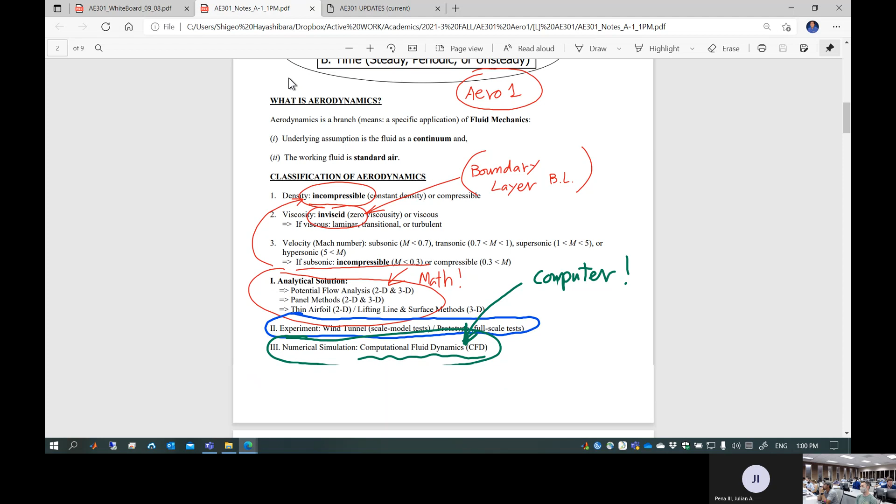Don't do that. Can you give us what is standard for each? Sure, let's just go back to the notes we covered in last class. Okay, that's the best way to start. I'm gonna talk to him, don't worry about it, let me handle that. PSI is not standard, so here we go. This is standard unit.

Stick with engineering. Okay, Aero 1. Sorry, so PSI, I never use that. Use PSF instead, it's pressure. Okay, here we go, this is standard. PSF, not PSI. You have to convert PSI to PSF. It's not kidding. Okay, you might be smiling here, but I'm dead serious.

People misunderstand that kind of basic things. That's why people die. All right, it's not joking. If I need to correct a professor, I'm corrected. I'm an engineer, okay? So don't believe PSI is the standard. Whoever said it, it's wrong. I can take it to the court and squeeze the money out of it. You said the wrong thing, right.

So this is PSF. Of course, foot is always used. Now the danger of using PSI is, of course, you keep using inches inside your computation and end up having the wrong result, and you never know because your argument is, well, I used inches throughout my computation. What's wrong with that? A students always do that.

Because they're so consistent, they don't believe they made a mistake. But pound force can never be created from inch, you need to have foot. Suppose you have a problem involving combining certain things to create pound force. Do you remember last class's example problem? If you use inches, you can never create pound force out of it, right? You need to have foot. Because pound force by definition is slug, not pound mass, slug foot per second squared. So don't stick your pound mass number in it. Don't stick your inch number in it.

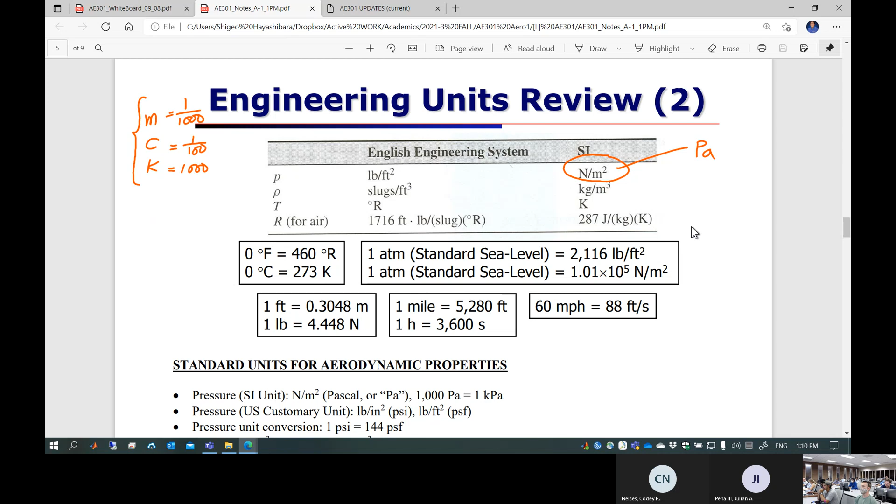So A1, we talked about engineering units. These are the standard units we are going to deal with in aerodynamics class. Obviously I'm not going to use PSI. If somebody gives me PSI, I'm going to quickly convert, first of all, to PSF, then move on from there.

You should do the same thing as you work on quiz 1, A and B. Pre-process to begin with, then use only the standard units and associated values in your computation in your calculator, and after you get the results, they should all be based on standard units. If you want specific units later, you can convert back again to get the desired units. It's a twice conversion process; pre- and post-processing is always involved in your computation.

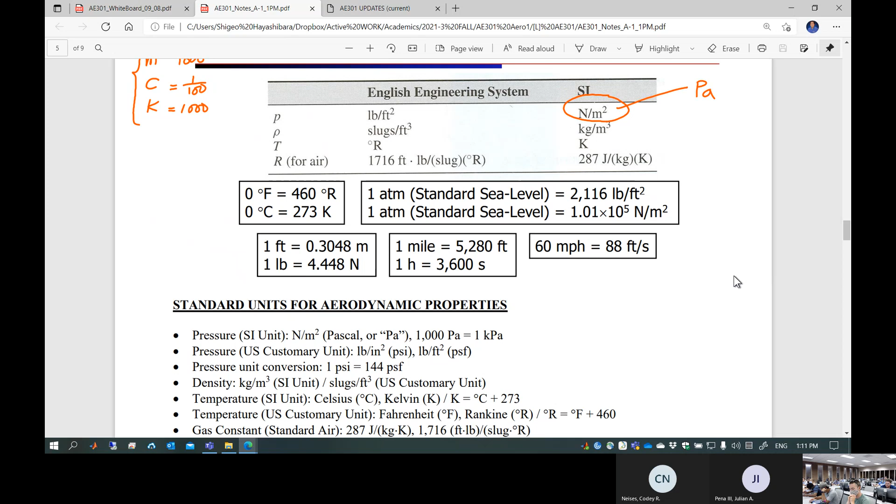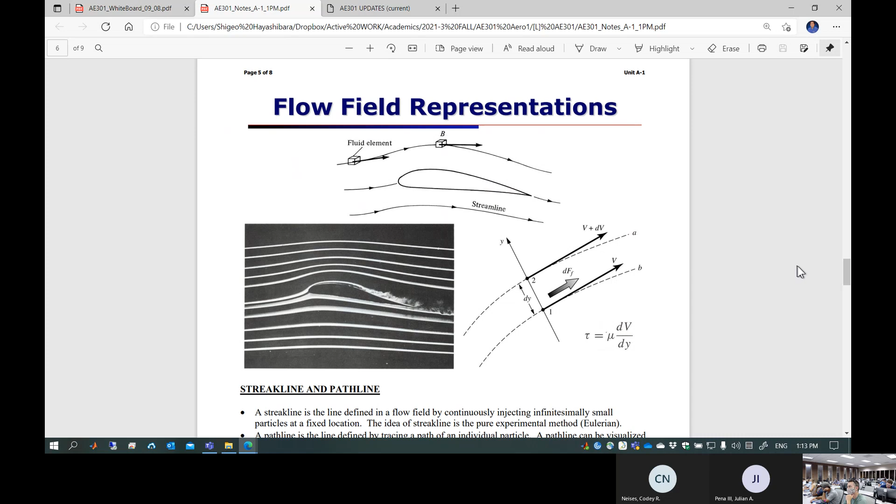Do you remember the flow visualization concept in fluid mechanics? We have 3 different kinds of concepts. Number 1, people talk about path line. What is path line? Is it different from streamline?

Isn't it path line? What is path line? Path line is where your fluid element travels. But a streamline, is it the same thing? It's the same thing, but not exactly the same thing. It's only the same when the streamline follows the path line. When does that happen? During steady state.

So in fluid mechanics, hopefully you've been exposed to three different concepts of flow field visualization. One is a path line. Is this a path line? Yes.

It's not. Anyways, the other one is a streak line. Is this a streak line? Yes, indeed, this is a streak line, it's not a path line.

Why is that? What's the difference between those two? Well, of course, it's a fluid mechanics concept. Path line is: if you release a single particle, that single particle takes the path. That's path line. This is a line made up by multiple particles released at a single spot - that's called streak line. It's basically ink, a streak of ink. If I have a pen creating a streak, this is a streak line.

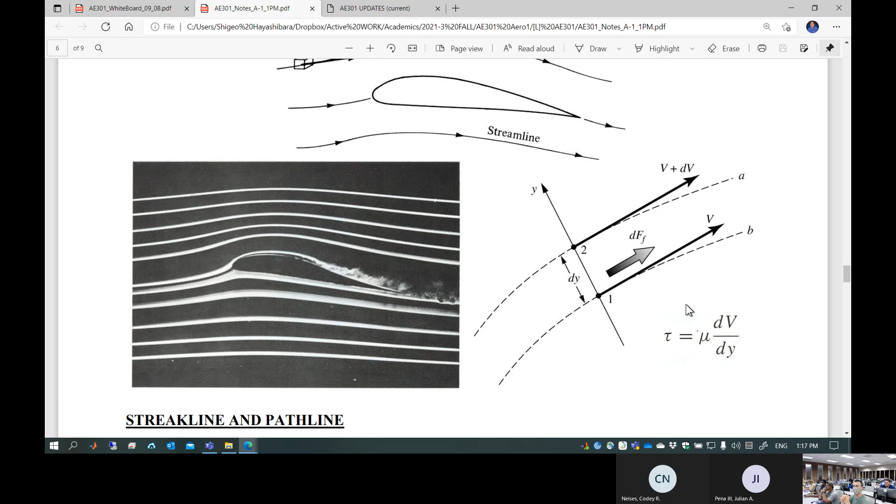So in aero, we are going to focus on streamline because it's a mathematical concept. Do you guys know the equation of streamline? Anybody? Go ahead, try. Have you ever seen the equation of streamline?

Okay, I'm going to let you derive it for the upcoming homework. So wait and see. If you don't know the equation of streamline, go rush back to your fluid mechanics, or take a look at my fluid mechanics notes.

Is it from Bernoulli's? No, equation of streamline - I'm not going to cover the same material over and over. This is an aero class. If you don't know what I'm talking about, go back and find out. Equation of streamline - is there such a thing? Yes, we do.

We're going to start from there because otherwise, how can we analyze the flow field? Aerodynamics uses mathematics to analyze the flow field. The simple starting point is picking up the equation of streamline. Do you guys know that? If you guys don't know even the equation of streamline, where do I start? I don't know - go back and find it.

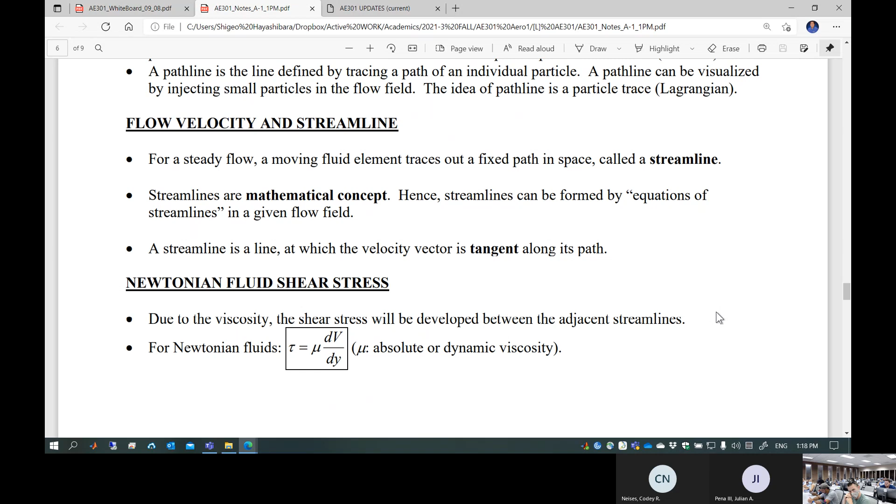And then if it's possible, go ahead and try to derive it. Coming from what concept can I get the equation of streamline? Okay? So those are streamlines, sorry, because this is almost steady state.

Now, if you draw a perpendicular path between those two streamlines, obviously the velocity changes from point 1 to point 2. Obviously something is involved - it's called viscosity. Velocity changes in the perpendicular direction over the surface.

Now, here's a pop quiz. What is the velocity right there on the surface? Zero. What do you call that? Stagnation? Not the stagnation point - it's a no-slip condition because of the viscosity.

So velocity starts from zero over the very same layer, keeps changing to the value you measure at the edge of it. This is called boundary layer. You've heard of it? Boundary layer forms because of the viscosity present. And within the boundary layer, because of the viscosity, you develop shear stress. Now, if you measure the shear stress tau right on top of the surface, it's called wall shear stress.

Wall shear stress is the source of skin friction drag of an airplane. Everything comes from fluid mechanics. What kind of equation is this? Have you ever seen that? What kind of fluid behaves this way? Newtonian fluid, linear relationship between velocity profile and shear stress through this property. What's that? Viscosity. This is called viscosity - dynamic or absolute viscosity.

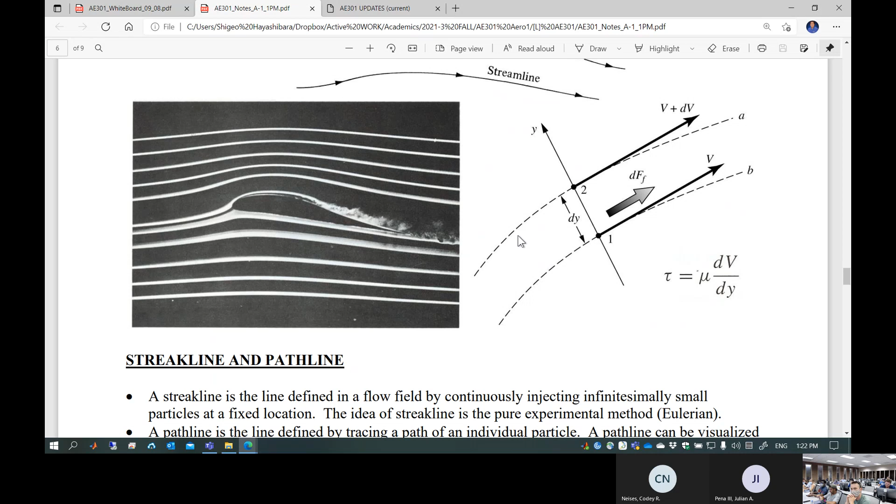Next page - so those are the properties we are going to define within a flow field. Pressure is P, lowercase. Density is rho, lowercase. Temperature T. Now those three things - pressure, density, temperature - those are related.

What kind of relationship do you know? There's ideal gas equation of state - pressure equal to rho RT. R is involved, the gas constant. In case of air, we use the specific gas constant for standard air, 287 joules per kilogram Kelvin, or 1716 foot-pounds per slug Rankine. I know those values because I've used them over and over again for like 40 years, but of course you should too. Those are the specific gas constant of air.

This is the velocity. Velocity is different from others - it's a vector quantity, so you have component-wise directional components: X direction component, Y direction component, Z direction component. You're talking about X, Y, Z Cartesian 3D. You have to deal with this as always a vector. So whenever you see an equation, some equation could be a vector form - that means a single equation can be broken down into three different components, depending on the coordinate system you're talking about. Of course, you know that.

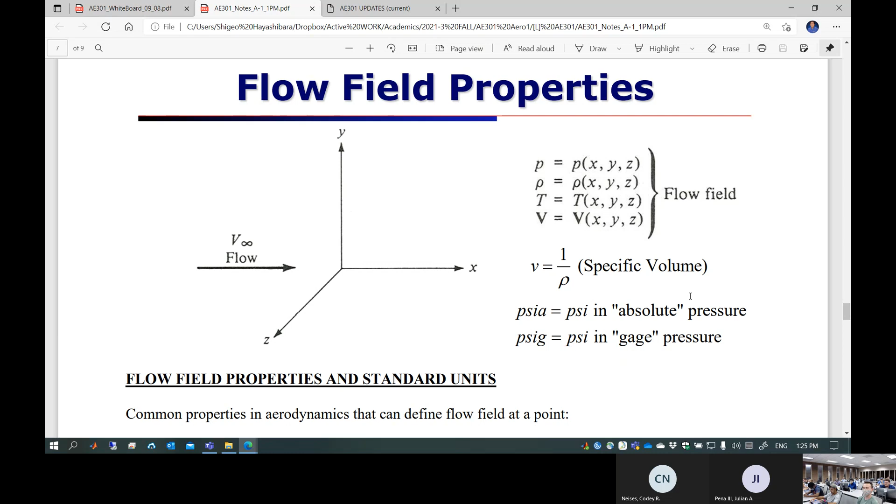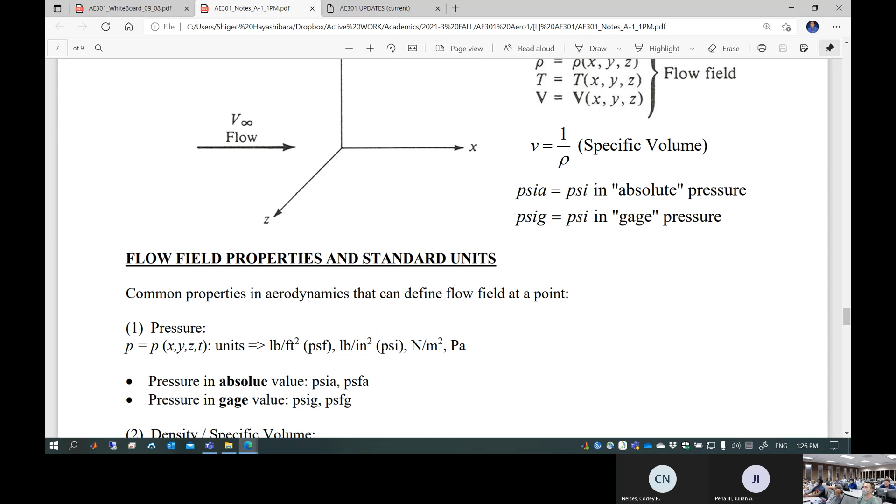And also, of course, PSI, PSI A, PSI G - absolute pressure versus gauge pressure difference. You guys know those differences. How do you convert absolute to gauge? Do you guys know the equation? P absolute is equal to P atmosphere plus P gauge. Not really? No? Anybody else? Not really, I don't do such a thing. So let's draw a line here - this is zero absolute. What's zero absolute?

Zero absolute pressure, what is it? Can you create such a thing? Not really, it's theoretical. If you can create the perfect vacuum, no absolute, no nothing, that's zero absolute pressure. Everything's measured from there. That's called absolute pressure, okay?

Then you have something called P atm, atmospheric pressure. This atmospheric pressure depends on where you are. If it's sea level, do you guys know the value? 2116, correct, or 14.7 psi, or 2116 point something psf. Okay, 760 millimeter Hg.

Anyways, so P atm depends on where you are. Do you think right here in this classroom it's still 14.7 psi? No, this is 5,000 feet altitude. It's probably 12.8 psi or something like that if it's standard here.

How much gauge pressure do you measure from this line? This is called zero gauge, classic definition. Zero gauge, not zero absolute. P atmospheric pressure is zero gauge. So if somebody says PSIG, it depends on what kind of gauge you're using.

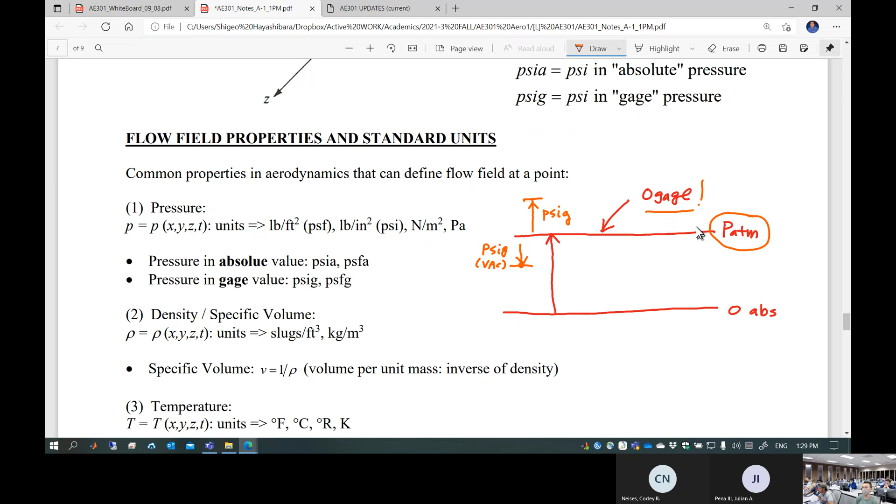So how do you convert, let's say minus 5 PSIG or 5 PSIG back, into absolute pressure? You're going to subtract that back. And then of course you know what is P atm in this room. You need a device, something called a barometric pressure gauge or something, to determine exactly what's P atm in this room.

So if you're looking at a gas tank, pressurized, ready to explode, and it says 25 PSIG, are you going to add or subtract? You're going to add to the local atmospheric pressure to get the absolute pressure of that tank. So it depends. Do not memorize equations. Picture this, this is the concept of gauge pressure and absolute pressure difference.

Okay? Memorization, I don't welcome that. Because memorization usually means that I have no clue, but I try to memorize anyways because I want to pass this exam. It's not going to work here. It's not going to work here. Either you get the concept right, know what you are saying or doing.

That's the only way, otherwise you can't go through this class. So I actually appreciate that, because that's typically what the professor says: hey, this is the equation, memorize it. No, no, no. This is the concept where those equations come from.

You grab that, not the equation. The equation, if you need it, you can derive it anytime. That's what you need to be doing. I force you to do this. In this class, you'll be tasked to do lots of equation derivations.

So think about this: if I know the concept, I can derive this equation anytime I want to. That's the skill set of an engineer. I want that. I'm not going to usually give you equations. Plug and check is over in fluid mechanics. You're not going to do plug and check. If you cannot even derive your own equation, there's no way you can plug and check.

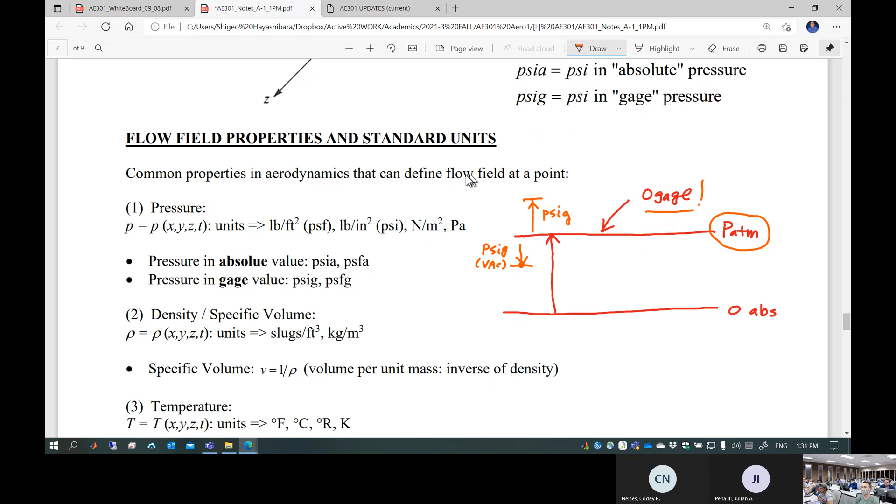Having said that, those are the concepts. So pressure, be careful about absolute versus gauge, obviously. Do not use gauge pressure inside of your computation. Usually not good, actually very bad for quiz 1 and quiz 1A and 1B. Only use absolute pressure, not the gauge.

Yeah, sorry, I'm just so confused. So, if it's given the atmosphere pressure... let's, Robert, let's just do it later. I can walk you through it. Just send me a text and let's get connected.

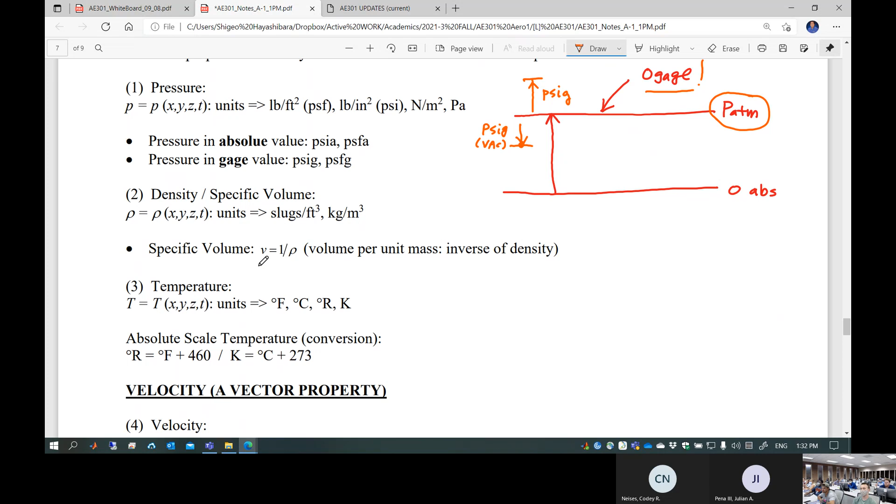Let me move on. Okay, density or specific volume. So those are the standard units. If it's density, slugs per cubic foot, I'm not going to use pound mass. Oftentimes, if you take thermodynamics, pound mass is given in your property table for information. You know why? Because the numbers are nicer. Don't pick up those numbers, use it as is inside your calculator. Always convert it to slugs. Thermodynamics.

Okay, now in Aero, I'm not going to use pound mass to begin with. I always give you values with slugs and inches. So this is a standard unit for density. If it's specific volume, it's cubic foot per slug.

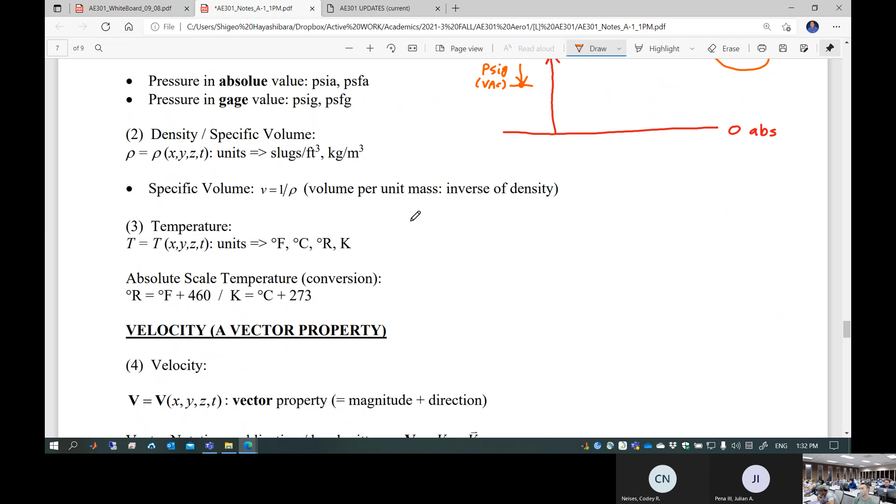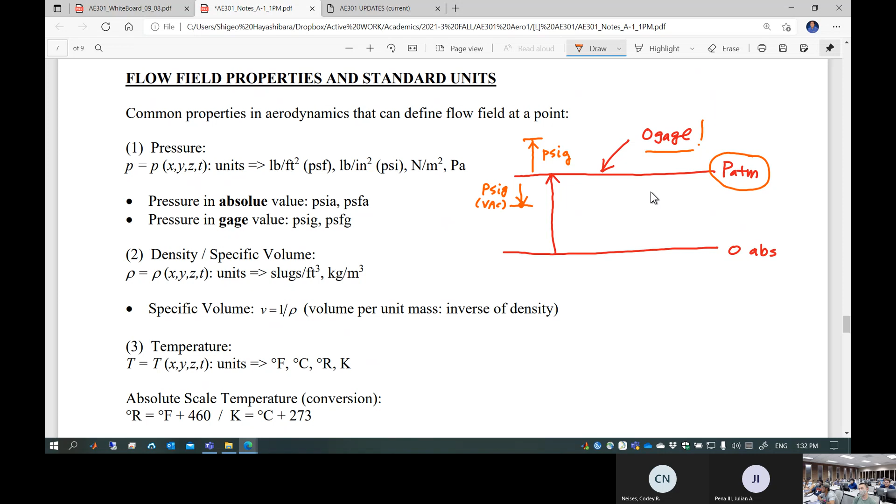Temperature: do not use relative scale temperature such as degrees C or degrees F, because those are measured from some relative value. Similar to gauge pressure, typically you're not going to use that. You're going to convert it to absolute scale temperature to begin with. So let's be extra careful about those.

Velocity is a vector, so you need to be careful about that. You're not going to mix up vector and scalar in a single equation. Don't expect any partial credit. I'm super picky about that. If the equation is a vector equation, treat it as a vector equation.

I'm not going to allow you mixing up those things. That means I assume that you don't even know the concept of vector calculus. You should go back all the way to the calculus class. Okay, so lots of things to catch up in this class. At least at the very beginning of the semester, I'm probably driving you insane. You need to go through it. That's the only way.

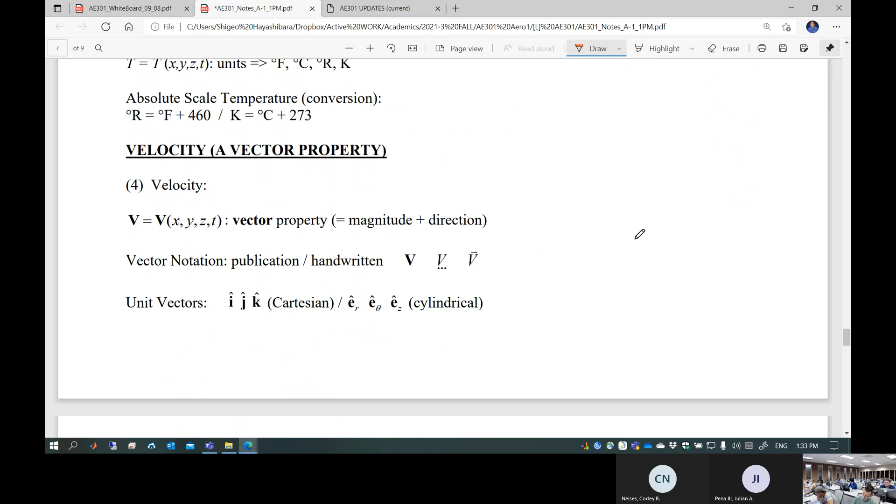Let's move on. By the way, those are the vector notations. In class and handwriting, if it's a vector, I always show it as a vector. So in handwriting, this is the vector quantity. Oftentimes in textbooks, the vector quantity is in bold typeface so you can tell, hey, this is a vector quantity. Be careful about that, but in handwriting it's very difficult to do, so I usually go with this handwriting vector.

Oftentimes space people use underline. When I took spacecraft orbital mechanics as a graduate student, the professor kept using underline for vectors. I said, whoa, that's underline, we never use such notation in Aero. Well, I don't care about Aero people, I'm Astro kind. Anyways, but sometimes people use this kind of notation. Be careful about that, get used to it.

Those are the unit vectors. Unit vector for Cartesian is very special: i, j, k, and I usually put a tiny hat on top representing this is a unit vector. What is a unit vector, by the way? It's a vector with magnitude of 1. Now those are the unit vectors of, let's say, cylindrical coordinate system: e_r, e_theta, e_z. This is the direction R, theta, Z, magnitude 1. Do you guys know one more coordinate system that we never use in this class?

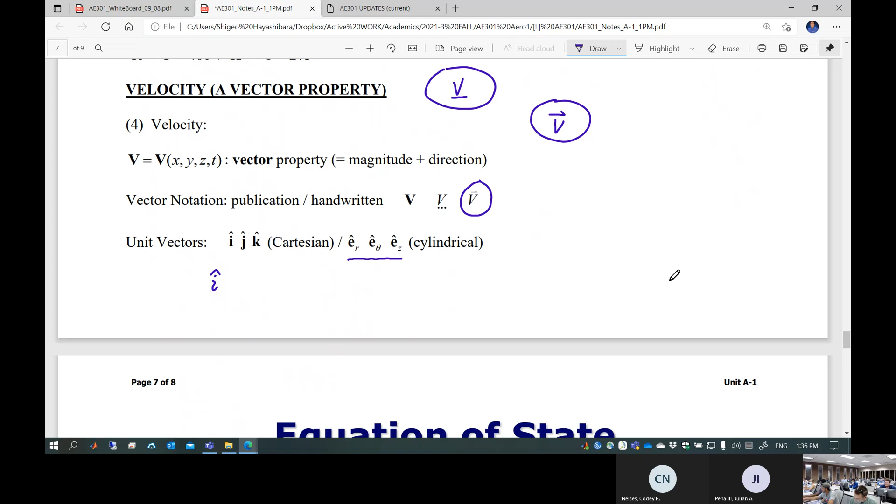So each time we're going to represent the vectors in a proper manner. Now, by the way, if you want to take a close look at that kind of stuff, I would recommend you go all the way to Unit B1, Mathematics for Aerodynamics. This unit actually covers tons of basic math, and this is 100% on YouTube. I'm not going to lecture in class, you don't have to wait for me. Go take a look, okay?

All right, so let's just move into the next page: equation of state. Equation of state is heavily involved in your quiz 1A and quiz 1B, of course quiz 0, problem 1A and 1B. Obviously, equation of state relates pressure, density, and temperature through a gas constant.

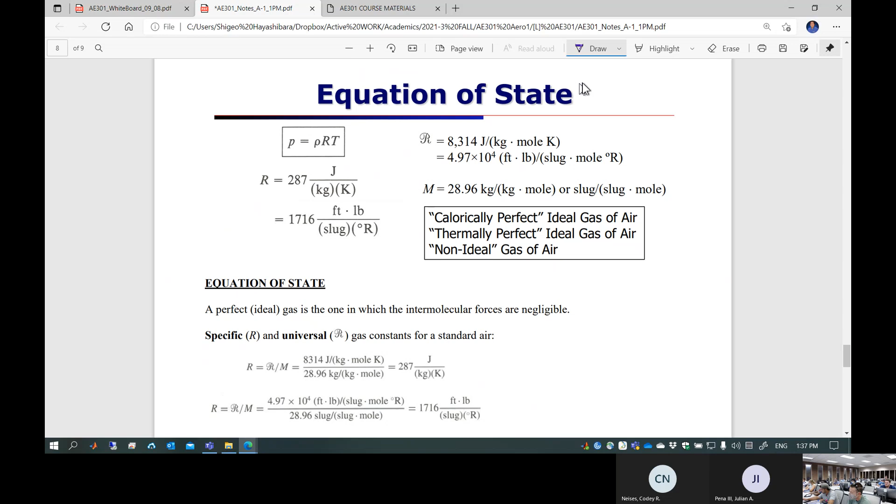If you're talking about air, air has a gas constant with those values. This is called specific gas constant, in this case for air, standard air. It is coming all the way from the universal gas constant divided by molecular weight. So this is the universal gas constant, and air comes with a specific molecular weight, so you come up with air's specific gas constant. If you're talking about nitrogen, nitrogen comes with a different value, very similar to air but kind of different.

So when you talk about quiz 1A and 1B, don't use those values, of course.

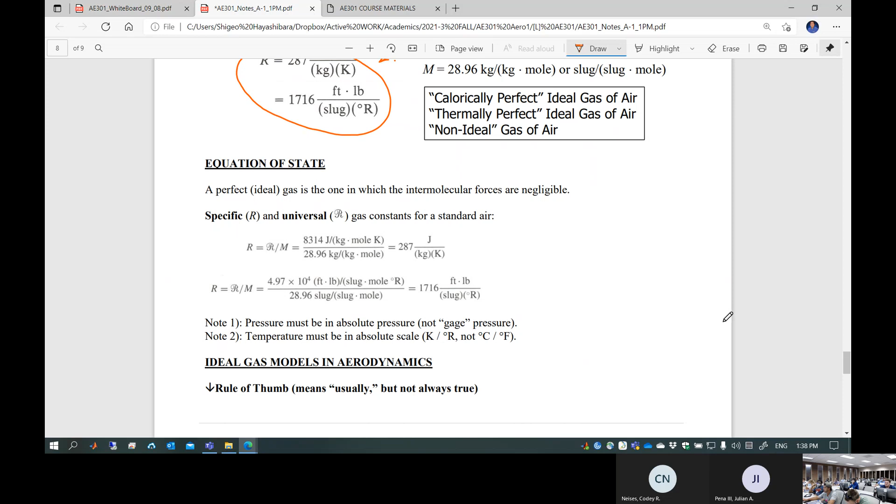Space Shuttle's landing gear is not filled with air, it's nitrogen. Nitrogen comes with different values of gas constant, so be careful about that. Those values are based entirely on standard units, so you can use this value as is in your calculator.

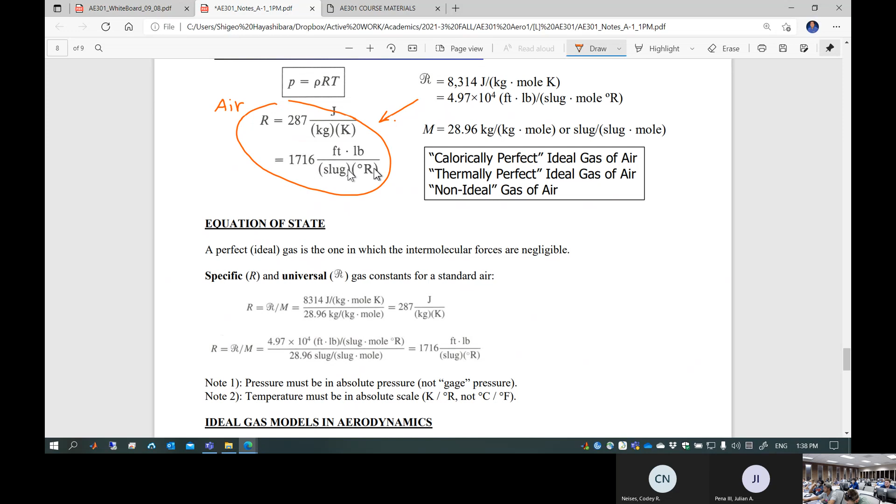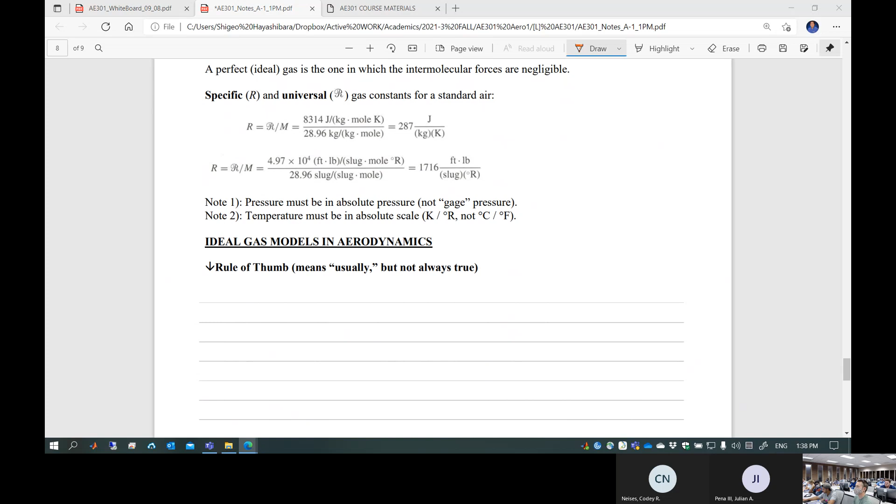Important thing is, let's just talk about equation of state. Equation of state is an important equation. You can relate pressure, temperature, and density with it. Here's an important question as you look at quiz 0 problem 1A, 1B. This is actually an interesting question coming typically from a non-engineering type person.

I went to Phoenix today, went to a car mechanic, and the mechanic filled up my tire with a very nice pressure, 36 psi, perfect, and there's absolutely no leak. Tire is perfect, mechanic's perfect, filled up with perfect pressure. Then I was driving back all the way to Prescott. All of a sudden, low tire pressure comes up. Wait a minute, is there any leak? No, there's absolutely no leak. What's going on? Pressure stays constant if there's no leak?

That's a very classic misunderstanding. Do you agree as an engineer, if there's no leak, pressure stays the same? No way, because temperature may be different. And then volume, because of the temperature difference, volume may change, because you drive a long distance, the tire volume may change. If the volume changes, the density may change. If the density changes, pressure may change, of course.

Only one thing remains constant if there's no leak. What's that one thing? Anybody? Mass. Mass, why? It's how much stuff there is if nothing's leaving. It's called conservation of mass. Do you remember that from fluid mechanics? That's a big hint. Only one thing remains constant: mass of air inside of the tire if there's no leak. Conservation of mass principle. Anything else could potentially change. Anyways, that's a big hint as you tackle quiz 1A and 1B.

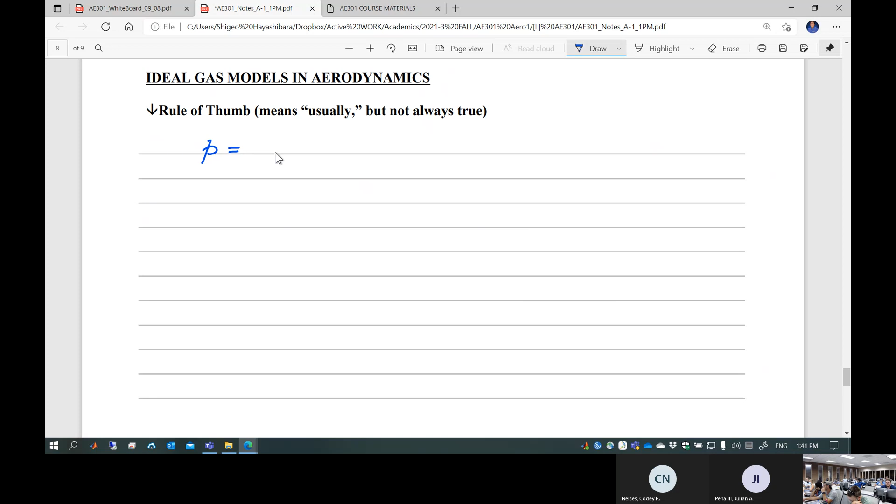So P equal to rho RT. You're going to apply this equation to solve quiz 1A, 1B, and also quiz 0 problem 1A, 1B. P equal to rho RT, right? Or since density is the inverse of that, you can say RT over lowercase v. Look, v equal to 1 over rho, or rho equals 1 over v, either way. So you can do that. This is specific volume. You can do that.

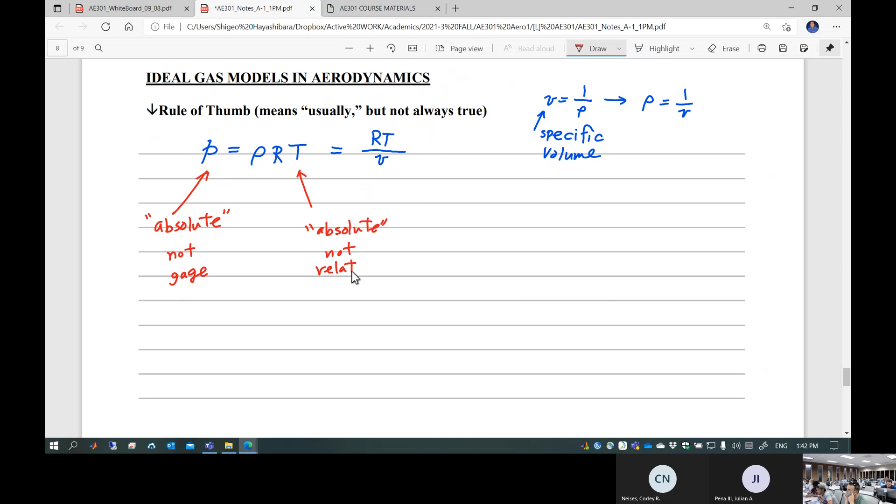Now, when you use this equation, you must be very careful about pressure here. This must be absolute pressure, not gauge pressure, okay? Temperature here, this is also absolute scale, not relative scale. Be careful about that.

Gas constant, 287 joule per kilogram Kelvin, that's for just air, right? Yeah, this is Newton meter, that's joule. Or 1716 foot-pound per slug Rankine.

Make sure all the units cancel out and line up. In other words, within the same equation, the unit on your left-hand side and the unit on your right-hand side must exactly match up, otherwise it's guaranteed wrong analysis. This is a unit problem, quiz 1A and quiz 1B, a unit problem - you show all the units of your numbers. Otherwise I'm not convinced; if you make some mistake and don't show units, don't expect much partial credit. This is a unit-focused problem. You show all the units, all your numbers. Everything you show with a number, show all the units. Please do that.

Question, Robert? Yeah, it's right, not good to just put joules, like joule is Newton meter. Yeah, but is it better to? Joule is a standard unit like a Pascal. You can use joule, that's fine. Any other question?

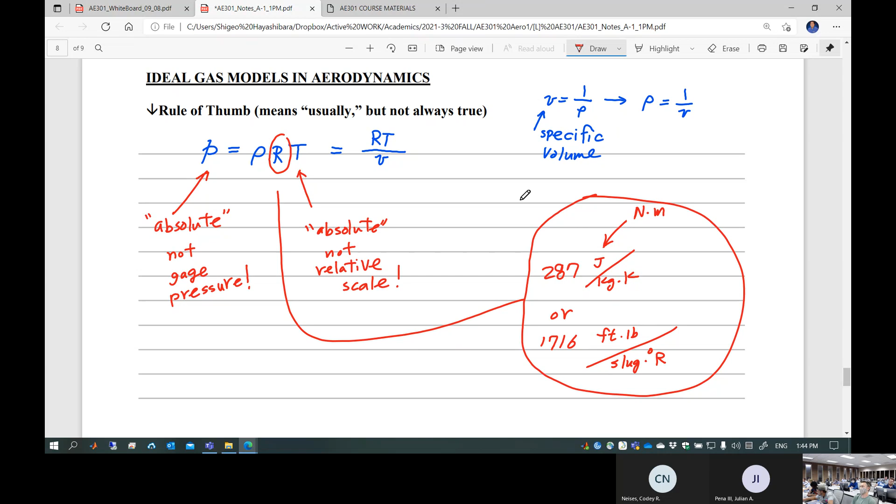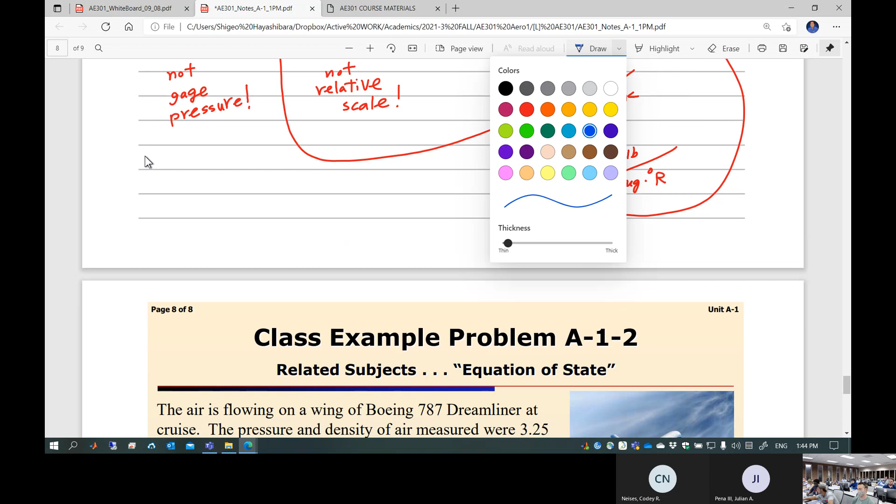Okay, so in aerodynamics, we are going to talk about different kinds of ideal gases. First one is calorically perfect. Oh my goodness, what's the one? Calorically perfect, or thermally perfect ideal gas. Those are ideal gases. So wait until we cover unit A3. We're going to talk about two different types of perfect gases or ideal gases: one is calorically perfect ideal gas, the other one is thermally perfect ideal gas.

How many people have actually taken thermodynamics? Can you tell the difference for those? One is based on the pressure of water. No.

Well, specific heat is a property of a substance. It's how much energy you need to raise the temperature of this substance. Let's say air has its own specific heat value.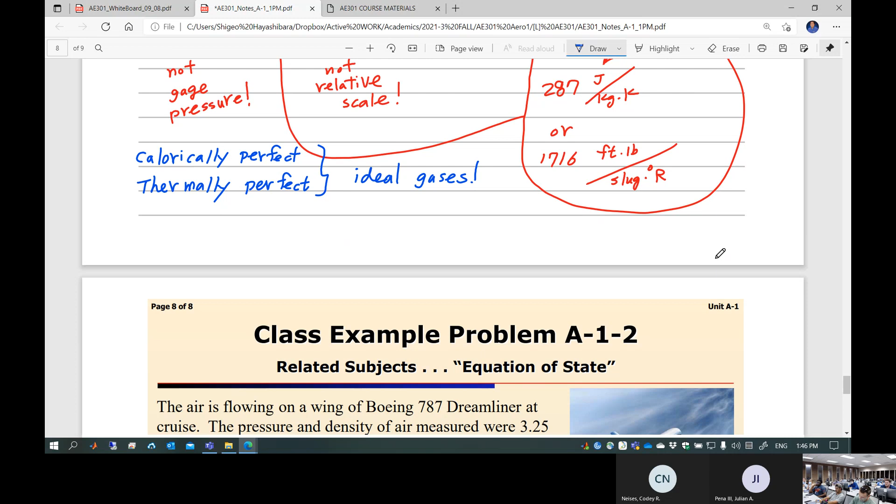Right, now we are running out of time. I couldn't finish up unit A1. That means I cannot say, hey, turn in homework tomorrow. No, you can't, I can't do that. I haven't done this example A1-2. So, but don't wait until I announce the homework due date.

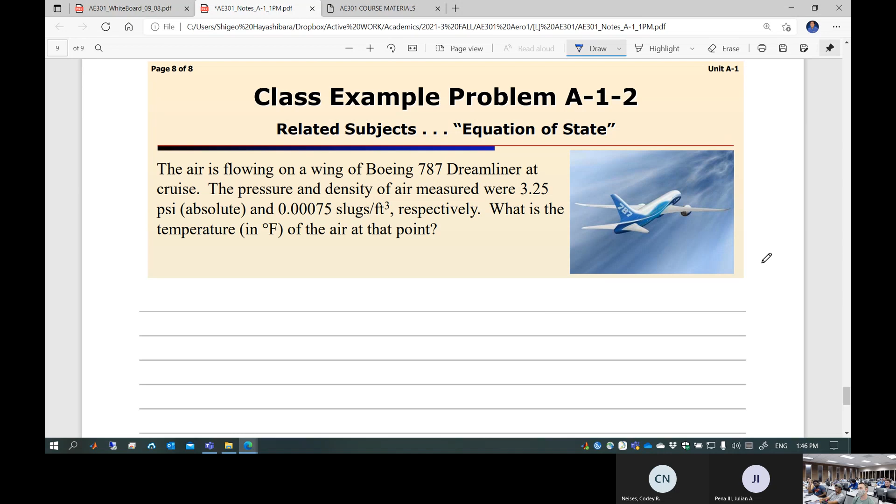Okay, take a look at this problem. And then after I complete this example, A12, of course, you can basically start doing homework assignment A12, A, B, C, D, E. Homework A12 is based on classroom example A12. Go ahead. So as of now, we have the knowledge and materials necessary to do A11, but not A12.

Well, I'm not sure, you can take a look at each problem. I guess you can probably solve it, based on where we are in the lecture. Just where we are is I haven't done classroom example A12. Got it, so I cannot say, hey, turn in homework next day. Well, I cannot do that. So for the mandatory self-learning materials...

Do you want us to start watching those now, or would those be like an assigned thing later? You can do it anytime, but I usually try to tell you, okay, now is the time, take a look at this YouTube video kind of thing.

Now, this unit A2, I want to spend some time going over the hydrostatics of fluid mechanics, because this unit is entirely based on the fluid mechanics hydrostatic equation. I want to spend probably next class reviewing that, and then I'm going to tell you, okay, take a look at this.

Any other question? Go ahead, just kind of a scheduling thing. After we complete the second problem for unit A1, then we're going to move on to hydrostatic pressure equations after that for the next class.